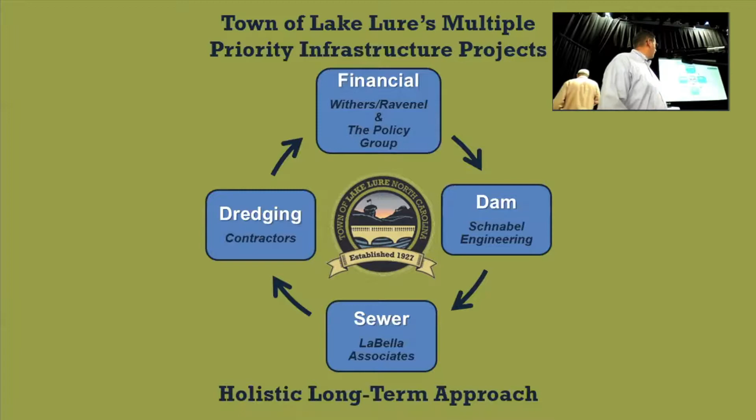So what I'd like to do is start with a little bit of history so you understand what your system is, where it is, some of the issues with the system, what our goals are, and then go through some of the proposed solutions and some of the community involvement that is required.

So to start off with, you can see the green arrow, that's actually the sewer system. This photo was taken sometime around 1927. The sewer line was installed on the north bank of the Broad River. The dam was built on top of it, the lake was filled up, and thus you have a subaqueous sewer system, or a submerged gravity sewer system. It ranges in depth between 4 feet and 105 feet. There's approximately 14 miles, or 74,000 linear feet, of cast iron pipe.

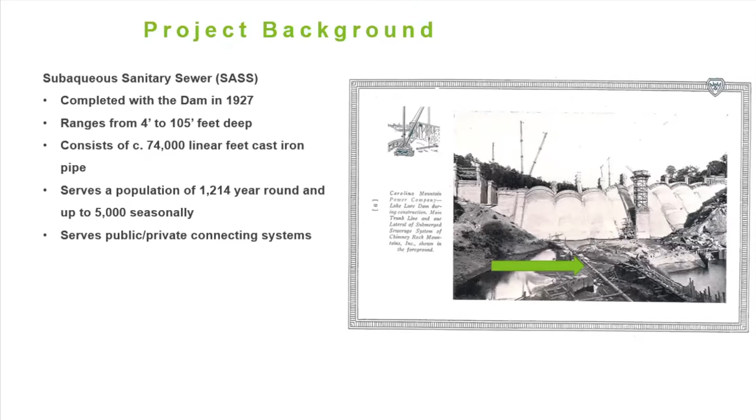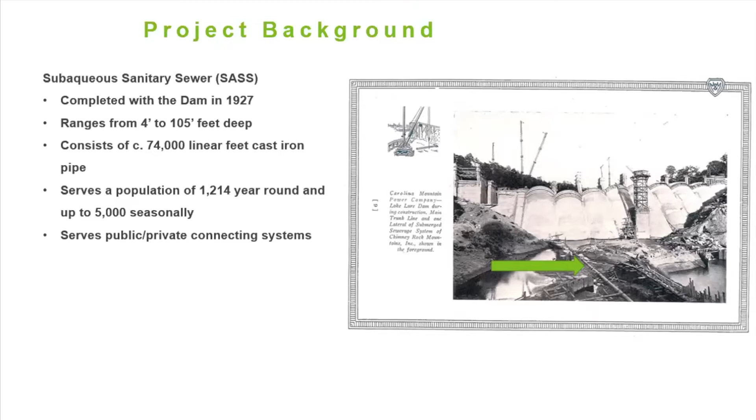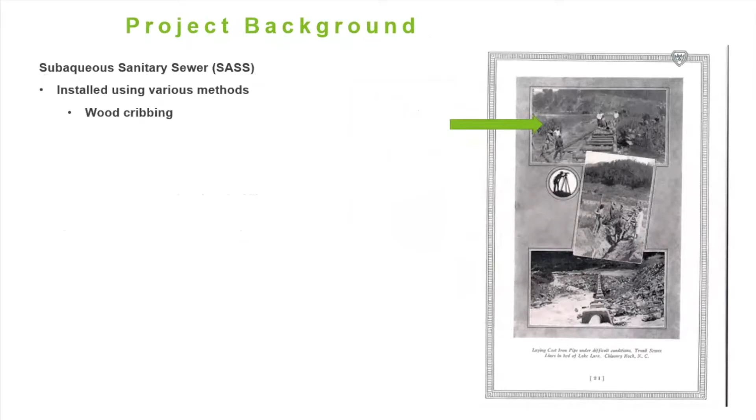You do have a seasonal population, so your full-time population is around 1,200, and it serves both public and private customers. So you have Rumbling Bald and the Rutherford County line that serves Chimney Rock Village. It was installed in a number of different ways. One of the ways was on wood cribbing. It was also installed buried under what would become the lake bed.

We believe most of the installation was like the third photo here, which is basically laid on top of the ground with concrete collars over each joint. So what we have installed along the existing grade ranges in size between 8 inches and 18 inches, and contains various bends and submerged junction boxes.

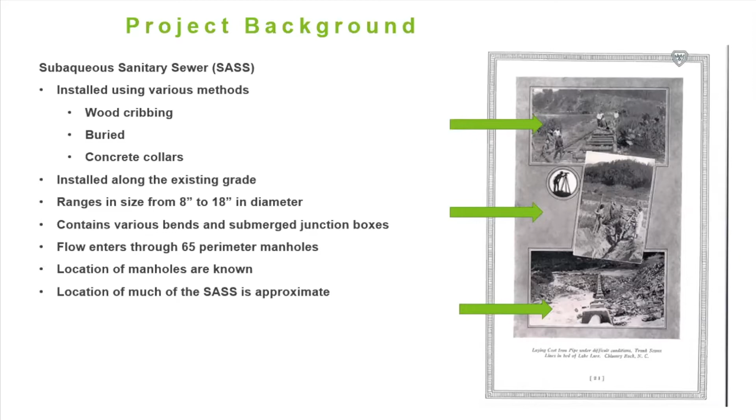The perimeter manholes that you see around the edge of the lake feed into this system that's under the lake. We know where the manholes are around the lake, obviously, but we have to make guesses about where the system is under the lake. So we don't know exactly where that system is.

Your treatment plant, prior to 1969, simply discharged into the Broad River. After the Clean Water Act, a biological plant was built, and almost immediately began suffering problems from the lake infiltration, or the lake water that's getting in the sewer and diluting it to the point that it's very difficult to treat.

In '91, that came to a head and the plant was converted to a different process, a physical chemical process, so your plant behaves more like the front end of a water treatment plant than it does a biological wastewater treatment plant. The plant has suffered from numerous notices of violation that deal with the flow rate, ammonia discharge, and total suspended solids.

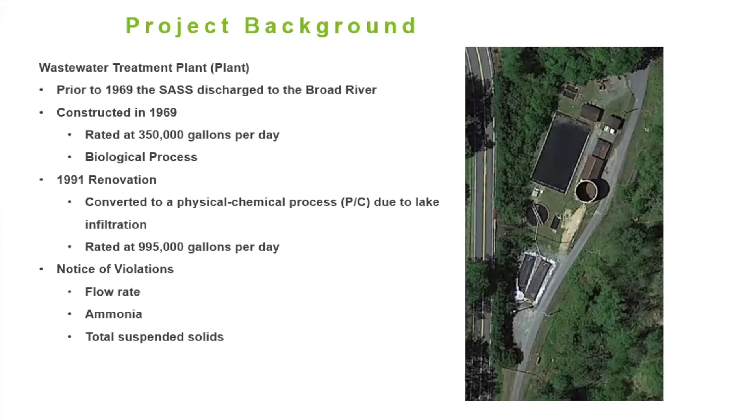The thing to realize about your current treatment process, the process put in place in '91, is that it cannot meet its current limits. So it's not a matter of running the plant differently or running it better. It physically cannot remove ammonia, so it cannot meet its NPDES limits.

Some recent projects that the town has undertaken to stem the tide: the first, in 2007, was an inspection and smoke testing, where they inspected manholes and closed circuit televisioned as much of the sewer line as they could. They were limited to about 14%, and a lot of that is because of those bends and junction boxes I mentioned, and the fact that the system is almost exclusively inaccessible.

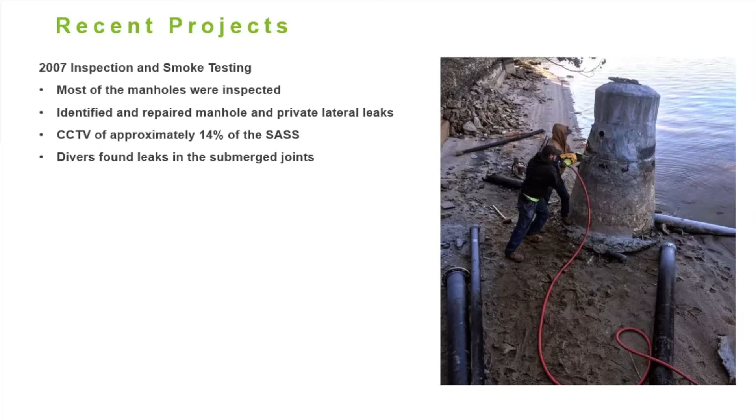Divers did find leaks in the submerged joints, which led to the 2009 pipe wrap project. Both of these previous projects were very successful, and they reduced the amount of infiltration in the lake. The pipe wrap project has a 15-year service life. It was done in 2009, so 2024 is the end of its expected service life.

Very recently, an emergency shutoff valve was installed behind the dam. What this would do is actually cut off the sewer flow going to the treatment plant, and this would be used in the event of a failure of the line underneath the lake.

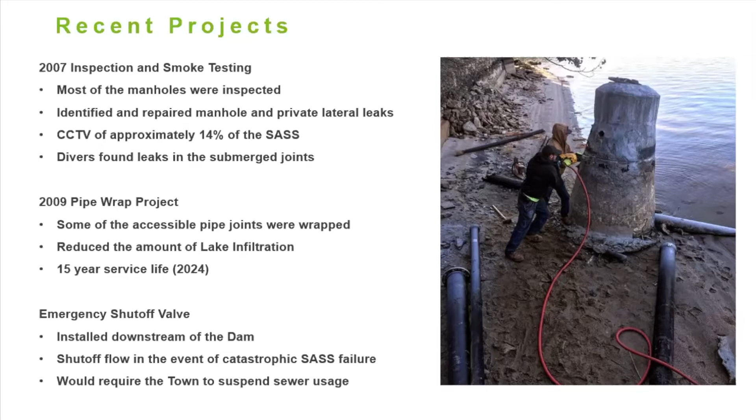The imagery, if you would imagine a bathtub that's 90 feet deep and you pull the plug, that's what would happen. If this happened, there would be a no flush order, meaning you could not introduce new sewage to the system, shutting down your kitchens and bathrooms, etc. The problem being that right now the lake water is getting into the sewer. If the line broke and we closed this valve, the sewer could get into the lake water.

Here's a picture. This is about 300 feet upstream of the dam. You can see the deterioration and the corrosion. Your subaqueous sewer system is non-compliant.

You have a long history of violations. It's been identified by the EPA as problematic. It's at risk of a complete failure. The pipes are deteriorating, nearly 100 years old. And again, a failure would result in a no flush order.

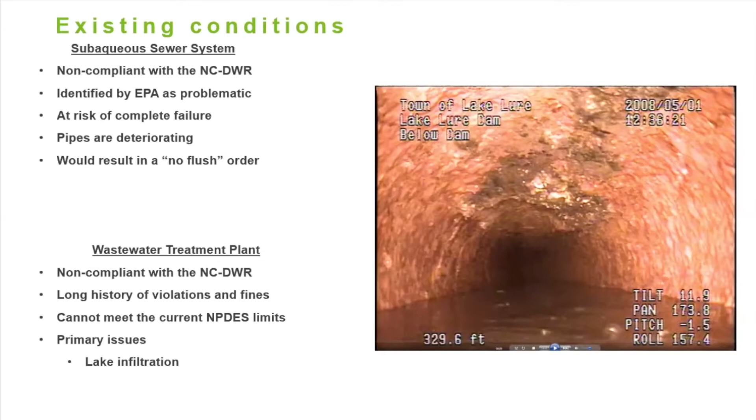Your wastewater treatment plant is also non-compliant for the reasons I've mentioned, with a long history of violations and fines. It simply cannot meet the current limits, and the primary reason, again, is lake infiltration.

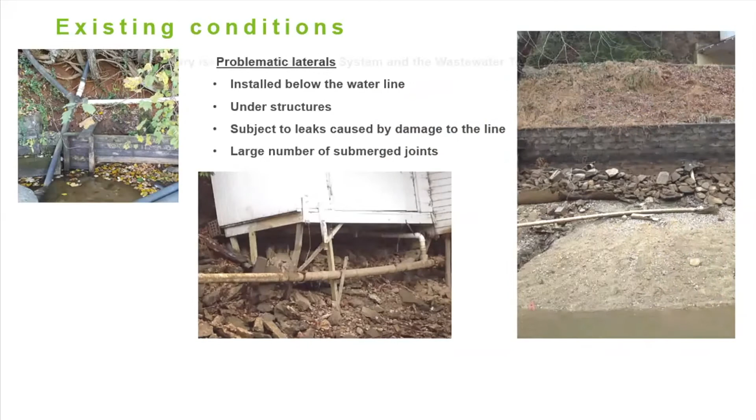Some other conditions are the laterals that you see around the lake, especially when the lake is pulled down. They're installed below the water line, under structures, and are subject to leaks caused by damage to the lines. You also have a large number of submerged joints, and any of these joints can be sources of lake water getting into the sewer system. So again, the primary issue facing the sewer system and the wastewater plant is lake infiltration.

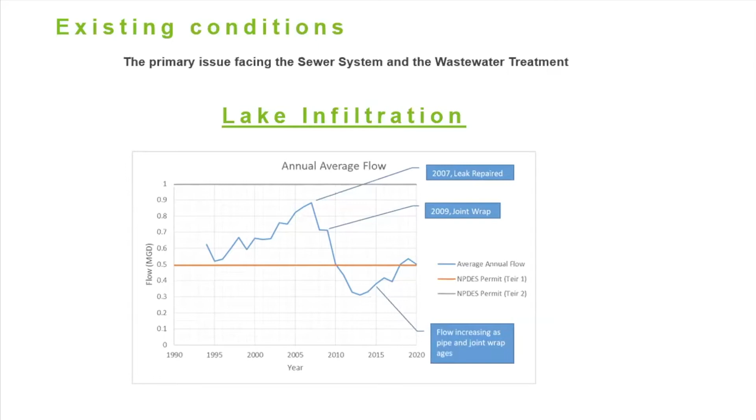But what you see as the pipes continue to age and the joint wrap continues to age is the flow is starting to creep back up, and it will continue to do so.

So what are our objectives? Primarily, it's regulatory compliance, protection against catastrophic failure, providing a sustainable and enduring collection and treatment system, a solution that's financially viable for the town, that gives access for operations and maintenance.

One of the key issues with your existing system is not necessarily that it's underwater. It's that you can't access it. We can't put a camera in it. We can't look in it. We don't really even know where it is.

We want to incorporate future growth, reduce inflow and infiltration, and provide a long service life. So we're looking at a 100-year solution.

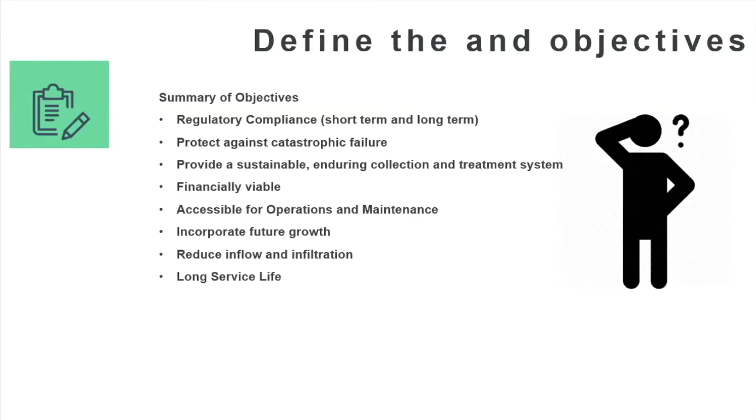So the proposed solution would be a perimeter system, installed around the perimeter of the lake, the north and south shore. It would consist of HDPE or high density polyethylene pipe and HDPE manholes with pump stations with laterals.

This system, instead of having a typical mechanical joint, would be a fused joint, which would eliminate a lot of the potential for leaks. We would, as part of the first phase, rehab some of the existing manholes.

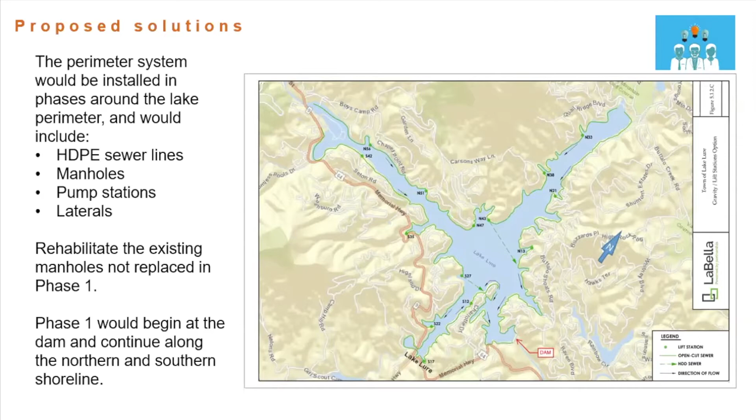This would help alleviate some of the flow problems at the plant and assist in treatment. Phase one would begin at the dam, and we'd work our way around the north and south shore.

Because of funding issues, we can't do the entire project in the first phase, but we have a strategic reason for this. As we start at the dam and work our way around, as we come past properties and those properties tie into the new system, they would be pulled off the old system and thus wouldn't have the risks associated with being on the existing system.

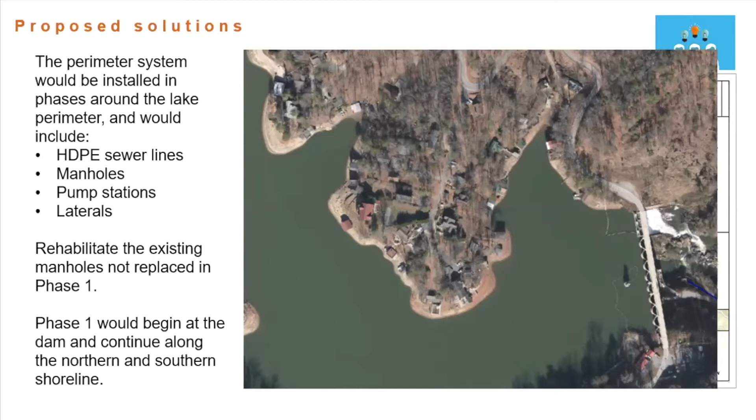So that if in the future you're tied into the new system and there is a failure, there is a no flush order, you would not be subjected to it because you're on the new system.

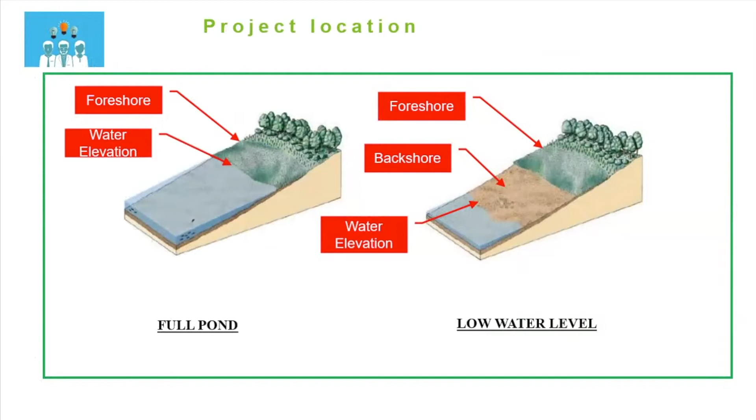So where would it go? This is what we're calling the backshore area. So you've all seen the lake when they draw the lake down and it exposes a shoreline. That is a prime place for installing the new infrastructure.

And this is what it would look like. So you would have an HDPE line that runs through the backshore area. And then you have a stub out for a lateral that would go up above the lake.

The yellow that you see is a permanent easement that would be acquired, and that would be a tie-in point for a property owner. So they would tie in out of the lake above the water line.

The benefit here would be that we would have manholes. So the line would be accessible to the public works staff. You could also lower the lake and access the entire sewer line itself, and you would no longer have those existing manholes around the perimeter or those private laterals that run below the lake level.

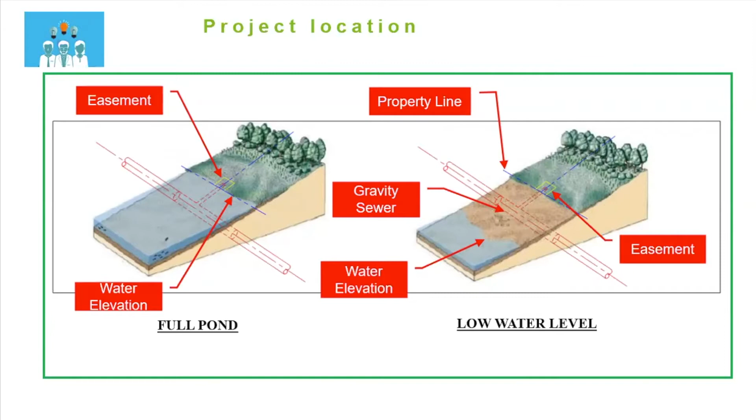We looked at a number of different systems. We've narrowed it down to three primary systems and one rehab. So the manhole rehabilitation would be a part of each individual system.

The first is a backshore low pressure system. So again, that's a low pressure system that's installed in the backshore. The second would be a backshore series pump station, and the third would be a backshore HDPE gravity lift system.

It's important to note each of these alternatives are taking place in the backshore. That is truly the best place to put the replacement system.

This is what they would look like. So this is an HDPE manhole, and it has a concrete collar, and the collar serves two purposes. The first is ballast to prevent the manhole from floating because it will be watertight. The second is it offers a amount of protection for the manhole itself.

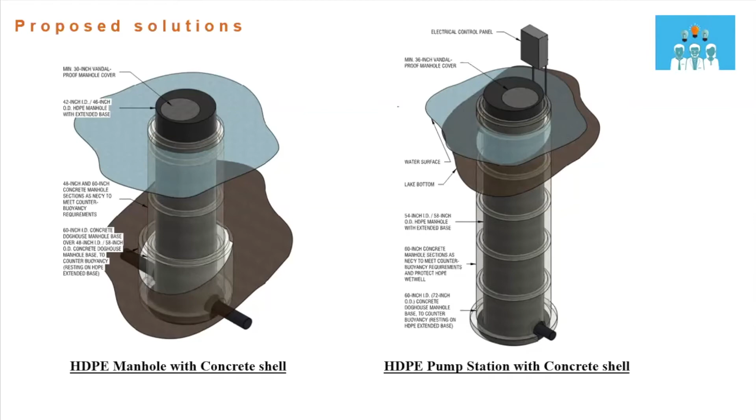The pump station would be exactly the same way. It would be an HDPE pump station with concrete collars that would provide ballast and protection.

The project, we're looking at three different phases. We're looking at three different steps. We're looking at a short-term, mid-term, and long-term.

So short-term is what's called a special order by consent. It's a legal agreement between Lake Lure and the NCDEQ, and it would protect against additional fines and penalties, protect it from further regulatory involvement against third-party litigation. It's important to note this is short-term, and it would not reduce the risk of a SASS failure.

The midterm solution is the manhole rehabilitation. And what this would do is extend the service life of the existing system. It would remove potentially hundreds of thousands of gallons of lake water that enters the system every day.

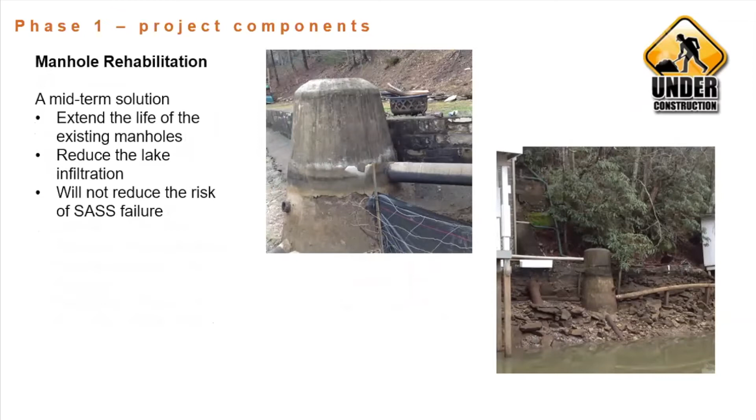But to note, it would not reduce the risk of a failure of the submerged pipes. An important component of this system is what we're calling a sewer access valve or a reservoir drain. It does double duty: from the sewer system, this would allow us to lower the lake below the current maximum or minimum water level.

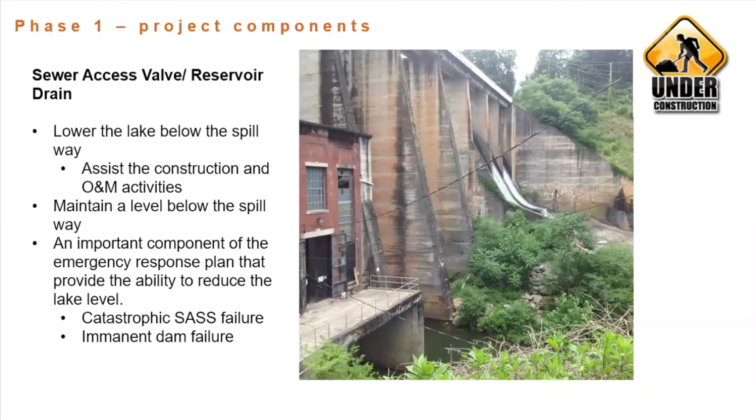So below the spillway, we're down to approximately 20 feet. This would give us an extra construction area for the system, and it would also help dewater the area. In terms of emergency response, it would give us an insurance policy to help with a catastrophic SASS failure, and it could also be used if you had some sort of damage or an imminent dam failure.

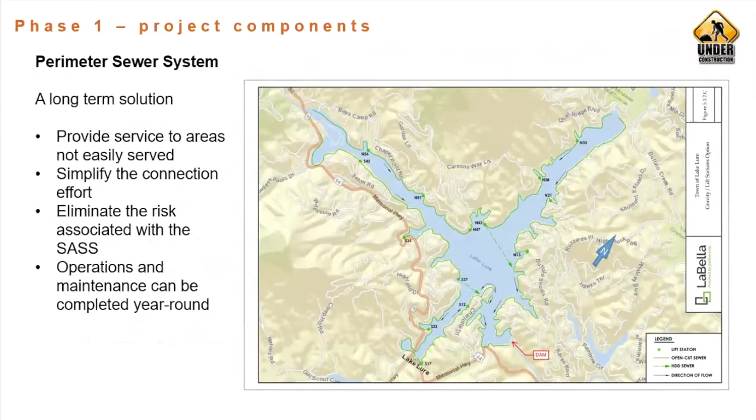The long-term solution is to replace the existing system. This would provide areas that are not currently accessed or are difficult to access. It would simplify the connection effort because you would be making your tie-ins at your property line in front of the homes. It would eliminate the risk associated with submerged piping, and it would assist public works with operations and maintenance, making it accessible and able to be completed year round.

With the schedule, what we're looking at this winter in January is bringing the lake down, and that would enable us to do a number of things.

We're looking at doing an RFEOI, which is where we bring contractors out who would be interested in bidding the project so they can see the project location and see what we're trying to build. Obviously, right now, the project area is underwater, and you can imagine a contractor would have some difficulty bidding a project that he can't look at.

We are also going to do some additional geotechnical work and surveying, with a plan toward beginning construction or phase one in 2021, 2022, or winter of those years.

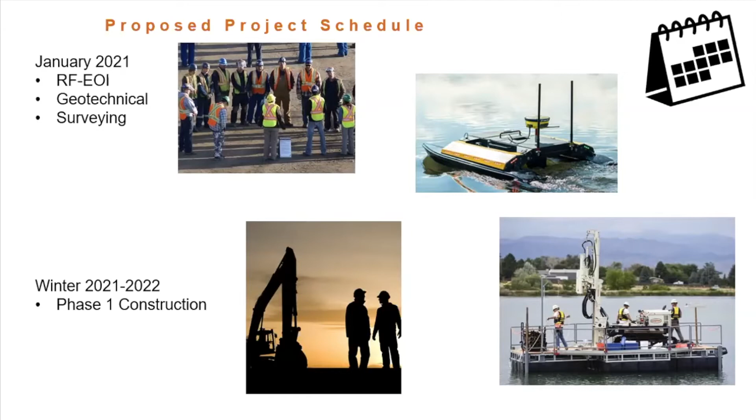This project will require community involvement. One of the big things is lake use. With the lake down 20 feet, the lake would be restricted during the construction period. There will be equipment on barges that will be on the lake, and pipe that's floated out in the lake as part of the construction process.

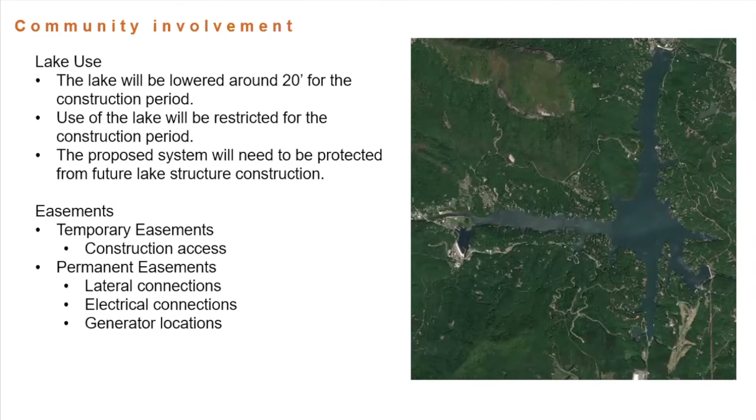In addition, once the new system is in, it's going to be running through the backshore, so with the new lake construction, we'd have to take steps to ensure that the new pipe is protected. There will be easements required - temporary easements for personnel, machinery, and materials during construction, and then permanent easements for the laterals I showed you earlier, for electrical connections and for generator locations.

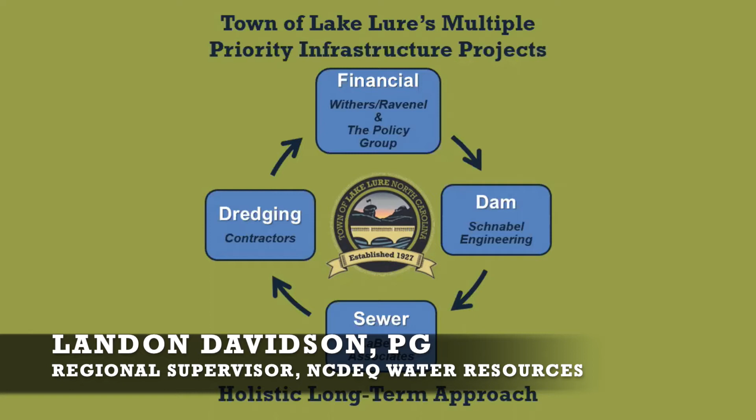Yes, thank you. So thank you for coming out tonight. This is a very big project, as you'll soon see. If you live here, which you probably do because of your interest, you know that it's a unique destination. I'm very proud of that. You should be - I live in Black Mountain, we come over here.

My agency is a regulatory agency that oversees protection of groundwater and water resources. So we oversee discharge of wastewater treatment plants, coal ash, animals for the 19 western counties. I am that person that signs and assesses the fines that they have referenced and the violations. Also the person that speaks with EPA.

The EPA is always interested in Lake Lure. We meet annually - they look at some of our more non-compliant sites, and obviously this is one of them, chronically non-compliant for the reasons that have been pointed out. I have been familiar with Lake Lure, at least in the NPDES - that's the discharge part of it - and the collection system since about 2013.

So I present myself today to tell you that I'm the person responsible for the compliance aspect and motivating that and moving it along. I'm also, on the other hand, a person that is completely trying to be engaged in this process and collaborating.

You should be very proud of where you are and where the town is right now. These types of public meetings with this level of engagement and networking is a rare thing.

Infrastructure degradation across the country is happening. It's happening in North Carolina at many locations and wastewater plants. The problem here is you can't just drive out to the pipe that's falling apart and replace it piece by piece like some municipalities are. You've got a much more complex and unique system. And when you have complex and unique, that often translates to a higher cost. It's a legacy problem.

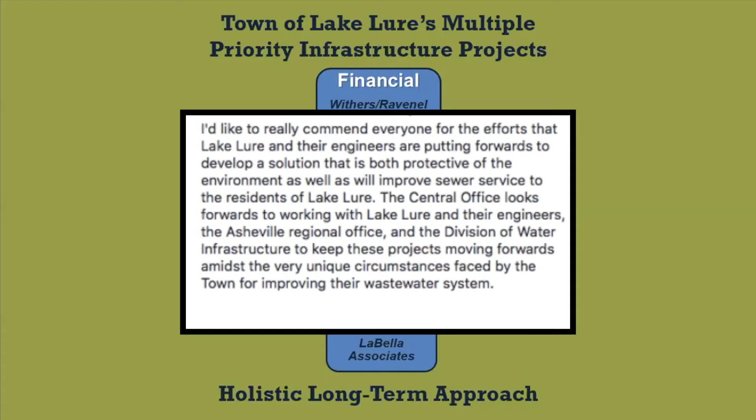We did have one further comment out of the main permitting office in Raleigh that echoes what you had to say. In essence, the central office looks forward to working with Lake Lure and their engineers, the Asheville Regional Office, and the Division of Water Infrastructure to keep these projects moving forward amidst a very unique set of circumstances faced by the town. I think that's a good positive outlook from the division, and they also commend everyone for the efforts they've put forward so far. Thank you very much, we appreciate your comments, Mr. Davidson. Now we'd like to turn to Jonathan Pittman with Schnabel Engineering for his presentation regarding the options on the dam.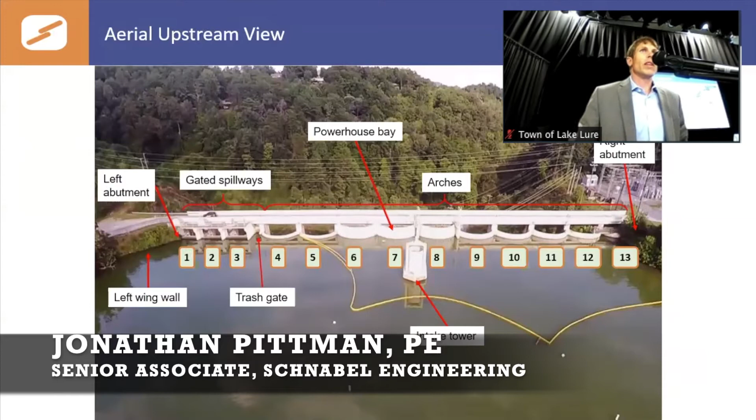All right, good evening everyone. I just want to share a little bit about the work we've done over the last couple of years to look at options to make some repairs to the dam, to address some state dam safety requirements, among other things.

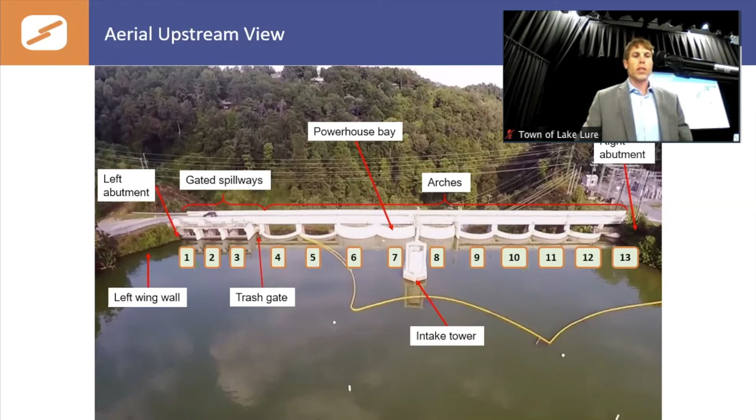Just first, briefly, this is to give you a little background. This is an aerial of the dam, looking from the lake downstream. This dam, like the sewer system, is nearly 100 years old, so it's infrastructure that's been in place for quite some time, and certainly can't expect to have a much longer service life without major upgrades or repairs. So this layout here, I'll reference a little bit - you see on the slide those bays are numbered 1 through 13, looking left to right there.

This is a very unique dam, a complex structure. Those bays 4 through 13 are what's called an arch buttress dam. I don't have time tonight to go into the details, but it was a really neat technology, really an engineering marvel in its time, developed primarily because when this dam was constructed, labor was very cheap and materials were quite expensive. So it's not a whole lot of concrete in that mass - it's a relatively thin structure that uses the weight of water to stay in place, essentially. So that's bays 4 through 13, which make up the majority of the dam.

Then to the left of that, you see bays 1 through 3, and that's the gated spillway section, or what I'll also refer to as the concrete gravity section of the dam. That's where you pass normal flood flows - when you get a rainstorm, you pass them through those gates.

This dam is regulated by the state of North Carolina, and there's different classifications for dams in the state, but this dam is considered a very large high hazard dam. The very large refers to the size of the structure - it's over 100 feet tall, about 125 feet at its maximum point, and it obviously impounds a large volume of water.

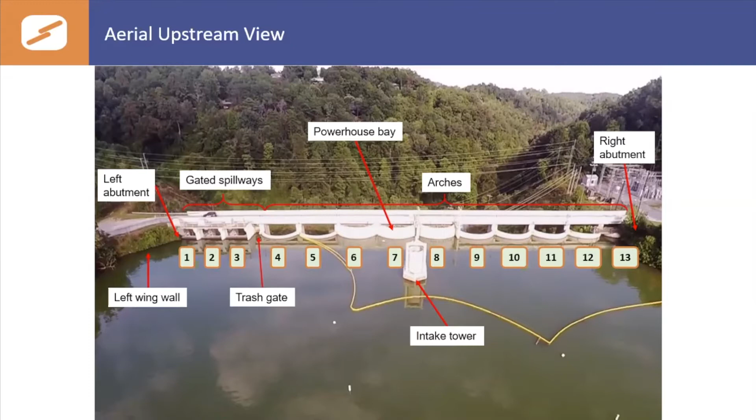In 2018, the state requested some additional information from the town, and the town brought Schnabel in to assist with that and to further evaluate the existing condition of the dam. Certainly the dam, like I said, nearly 100 years old - overall it's in fair condition considering its age. It's performed remarkably well over its service life, done what it was intended to do, what it was designed to do, and done it fairly effectively. But as I mentioned, it's nearly 100-year-old infrastructure, and it can't be expected to continue to perform well without significant repairs or other things. We identified several items that need repairs, ongoing maintenance, and that sort of thing.

On top of that, the dam has to meet certain criteria based on size and hazard classification. North Carolina dam safety laws really didn't come into effect nationally until the late 1960s, so this dam was built well before those standards. Those standards have been updated since based on things we've learned, better guidance, better science, and they continue to evolve with time. Because of that, this dam, like many others built at its time, doesn't meet current criteria across the board. Specifically for Lake Lure Dam, I've listed here the main components where it does not meet current dam safety criteria.

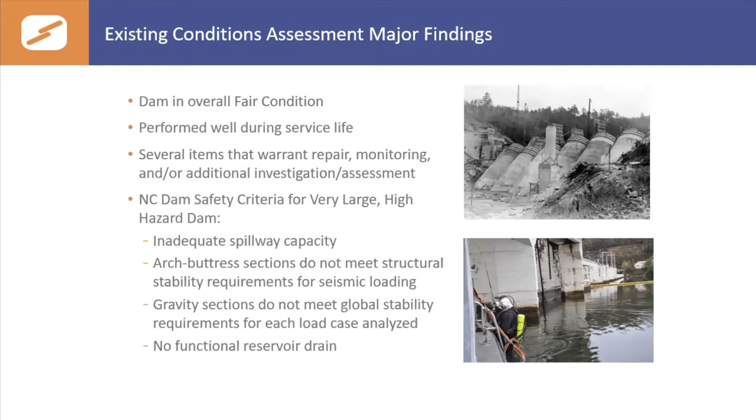Reese talked to you a bit about the sewer access valve, also referred to as the reservoir drain. In the dam safety world, I'm going to refer to it as the reservoir drain, but they're the same thing for this discussion. Dam safety requires that the town have the ability - all high hazard dams have the ability - to completely drain the reservoir in the event of an emergency, or nearly drain it. Right now the town only has the ability to drain the lake about 12 feet using the spillway gates, so there's a need to drain the lake to a much lower depth in an emergency. I'll talk more about the reservoir drain in a few minutes.

So to look at those, we have those criteria, which I'm going to refer to as deficiencies for this conversation. We need to address those deficiencies and dam safety requirements, so we looked at alternatives to do that. As part of that, we also had several other objectives to look at options to address those items. One of those is extending the service life of the dam significantly - you don't want to invest a lot of money in the structure if you're not going to get a much longer life out of it.

Also, not modifying lake levels for permanent purposes - you want to keep the permanent normal pool of the lake where it is. You also don't want to increase the potential for upstream or downstream flooding significantly. I've listed everything here and you have these notes. There are several other things we did consider when evaluating options, and one of them was minimizing impacts to the community to the extent possible during construction of any rehabilitation project and following construction.

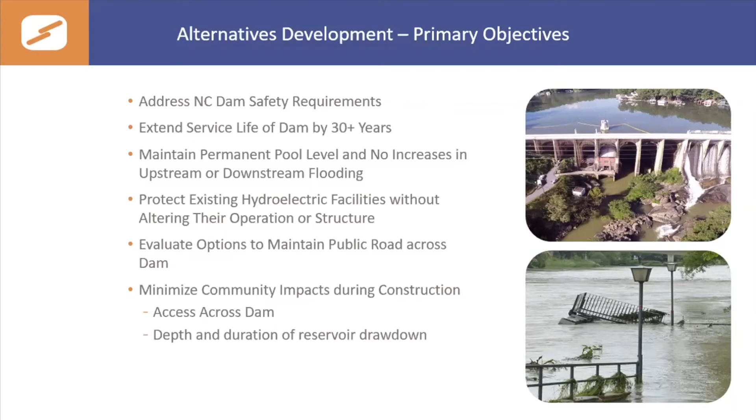From a dam rehabilitation standpoint, we looked at multiple options to address those items. I'm only presenting the one here that we feel is the recommended rehabilitation alternative, and these items address the main body of the dam and meet those dam safety requirements I already mentioned. So to meet hydraulic capacity, we need to pass more water through that dam. How do you do that? Well, one, we would improve the efficiency of the crest where the water flows over the top of that arch or weir, by changing the shape of that.

We would also lower those arch elevations, taking them closer to the normal pool elevation of the lake, so we can pass more water over them before it goes over the sides of the dam.

From a seismic stability standpoint, there are really two options to address seismic stability. One is to add bracing in between those arch bays. The other is to fill those arch bays in with concrete.

What you see in the bottom right is that geometry. You infill each of those arches with mass concrete, and you essentially turn the dam into a concrete gravity dam.

Similar to what you have now at the gated spillway sections at bays 1 through 3. At those gated spillway sections, to address the stability conditions I mentioned before, you would drill anchors through the concrete, tie those anchors into rock, and essentially ratchet that concrete down into the underlying bedrock to prevent it from potentially sliding. This project would also include the reservoir drain installation, which I'll touch on in a minute.

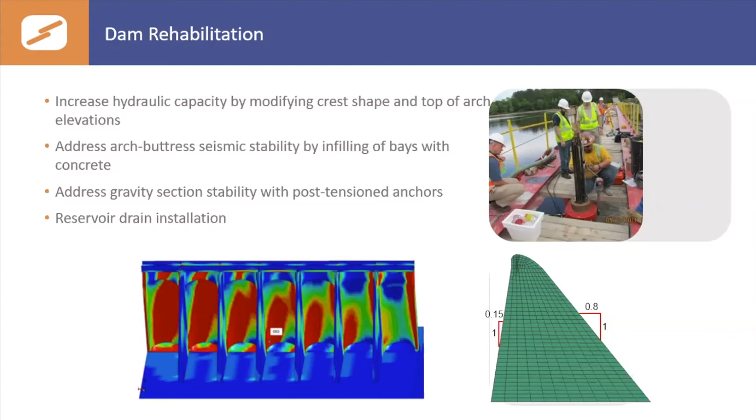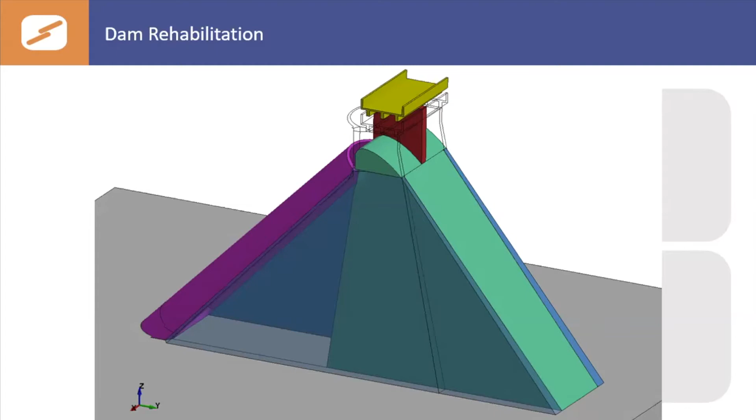So here's a graphic, which you can probably see better in your handout. The green you see there is essentially the infilling of those arch bays with concrete. You infill those with concrete, then you have that curved shape at the top. That's called an ogee weir, and that improves the hydraulics and allows you to pass more flow over the dam safely.

The main focus of our study was on rehabilitation options for the dam, but we also considered full replacement. What does that look like? It would include building a new concrete structure immediately downstream of the existing dam and essentially demolishing the existing dam, or the majority of it. Anything left would be well underwater at the lake.

There are some advantages to this option, and some disadvantages as well, which I'll touch on. One thing to address here is this would require new construction for hydroelectric facilities as well.

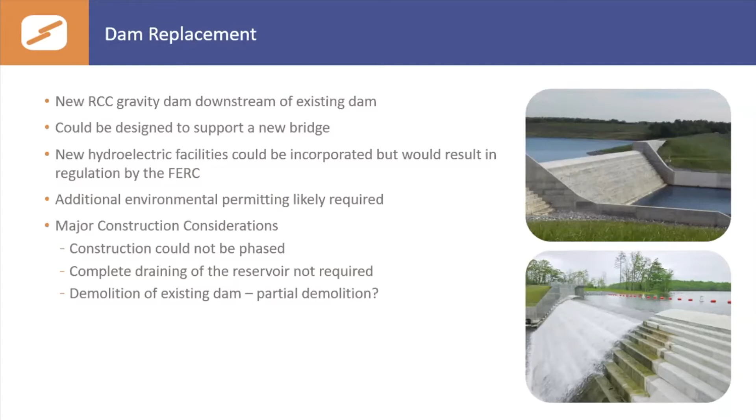So there are several other advantages and disadvantages here, but I'll go over those on the next slide. Here's an overall comparison of rehabilitation versus replacement.

We looked at options that both have extended service life. The rehabilitation is a major project. This is a very challenging dam to address those dam safety requirements, and there's no simple quick fix to do that. It involves a major rehabilitation and major modifications to the structure.

So what you get when you make those major modifications is a pretty healthy extended service life for that existing dam. For a replacement dam, you get an even longer service life. I put 100 plus years on here. It could last 150 more if it's maintained well, among other things.

Certainly, as part of this, there are multiple factors to consider in deciding whether it's rehabilitation or replacement. Again, with the existing infrastructure, you can't just look at the dam in one box and make a decision there. There's a lot of other related components, the bridge, the sewer, the lake itself and what goes on there.

So all those things need to be considered in selecting the best alternative for the dam. Certainly lake levels is one thing for a rehabilitation project. You would likely have to draw the lake down significantly for a period of time to do work on the intake tower and maybe the dam itself, whereas a replacement would not require a significant drawdown of the lake to construct. So you can phase a rehabilitation project more, potentially in a few different phases. That may increase cost, but there's a little more flexibility in terms of schedule.

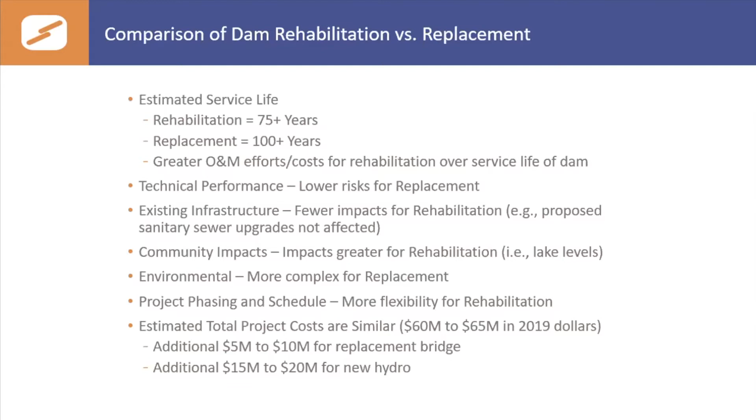You can see the costs down at the bottom are fairly similar overall in terms of estimated total project cost. You're looking at $60 to $65 million to rehabilitate or to do a major replacement of that dam. So a significant cost there. And I've listed a couple other costs that apply, for a bridge to go back, and then to add new hydro back to a dam replacement, that would be on top of that 60 to 65.

So the reservoir drain, I've talked a little bit about that. The town is moving forward with that project. It addresses multiple requirements. As Reese mentioned, it allows the sewer work and critical sewer repairs to proceed. It benefits lake dredging, allows that to be more efficient and potentially reduce costs. And it also meets the dam safety requirements.

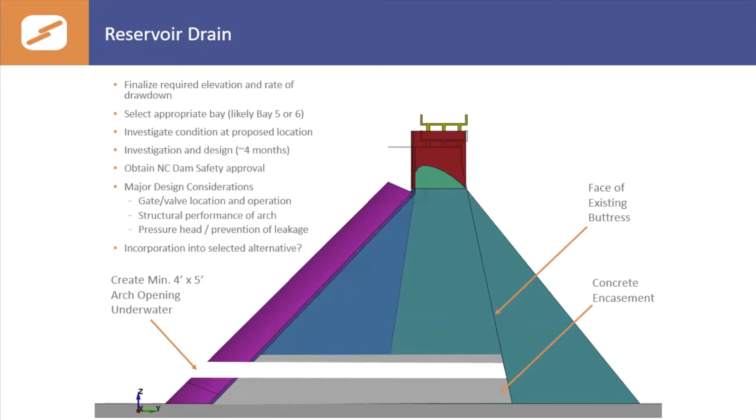So that work would be done as a separate phase and installed at the base of one of the arches in bays 5 or 6. And the town is taking steps to obtain funding through a grant from FEMA and others to move forward with that work to address the dam safety requirement and benefit several other infrastructure components.

So I've mentioned that the town is moving forward with the reservoir drain as the initial phase. The next steps for the dam ultimately are to decide which direction to go, rehabilitation or replacement. And there's a tremendous amount of stakeholders involved in this project. A lot of coordination with those stakeholders is required moving forward in determining the most appropriate path forward for the dam.

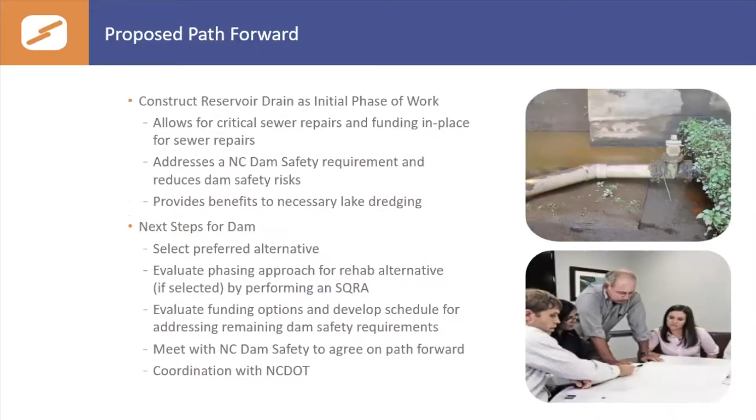I believe that's it. Thank you, Jonathan. Appreciate your presentation. And now we'd like to call on Mr. George Eller. He is the state dam safety engineer. He would be responsible for permitting and overview of the alternatives that you have seen. And now, Mr. Eller, if you would offer your comments, please.

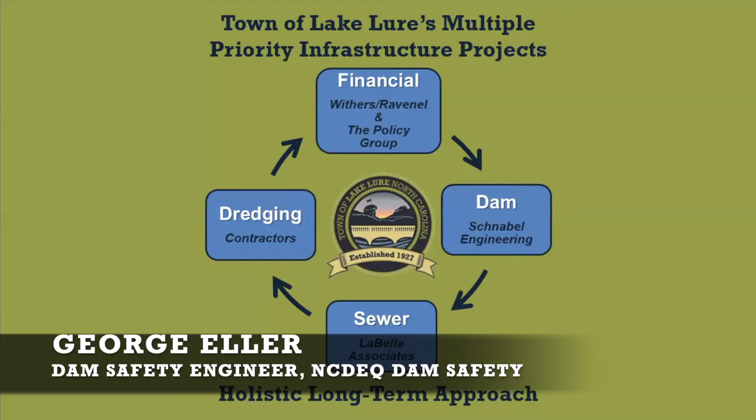Hi, I'm George Eller. I'm your state dam safety engineer for North Carolina. State dam safety, even though we're part of DEQ, much of our work is in public safety. We do work a lot with environmental emergency management out of the Department of Public Safety. And our main objective is the health and safety of the public.

Keeping people safe from dams and making sure that the dams are safe. This dam is a fairly large dam, as Jonathan said, 125 feet tall. It impounds 45,000 acre feet of water. That's a lot of water. It is a high hazard dam. High hazard meaning that if the dam should fail for whatever reason, people are likely to die.

There's quite a few people in the valley below the dam. There are houses, roads, other infrastructure, utilities, things that would flood in the event that the dam failed. The population at risk is estimated to be in the hundreds of people that would be likely to perish if the dam failed.

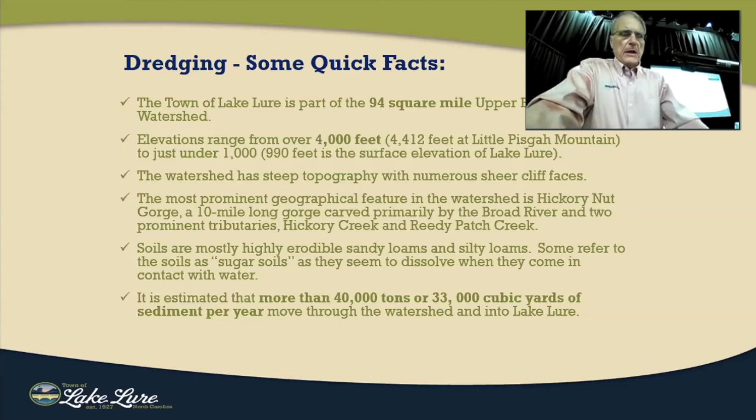So the town has to do something about that to keep the lake usable. To give you an idea of the size of that: there's 40,000 tons per year—this is per year, 40,000 tons. To give you a feel for 40,000 tons, some of you may have visited the USS North Carolina in Wilmington, the World War II battleship.

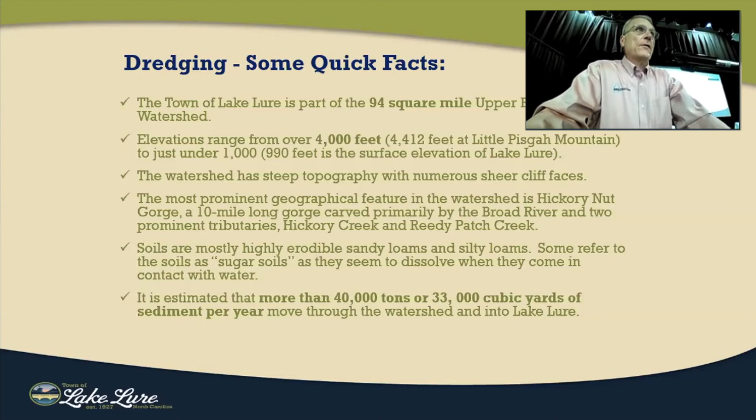That weighs 35,000 tons. Another idea: the 33,000 cubic yards that represents is enough silt to fill this entire gymnasium you're sitting in 3 times. That's per year, so that's quite a challenge for the town to get that silt out.

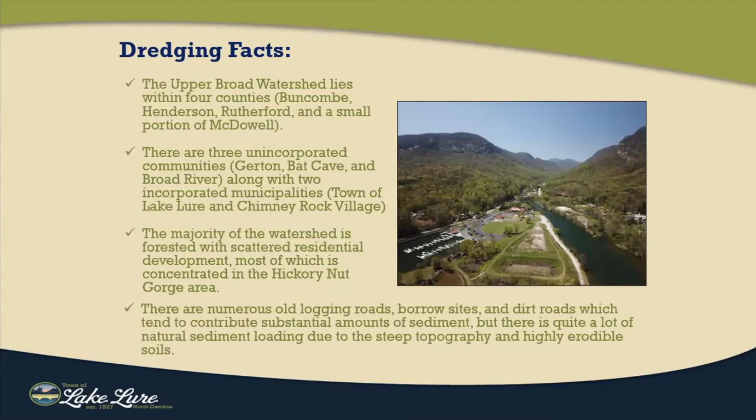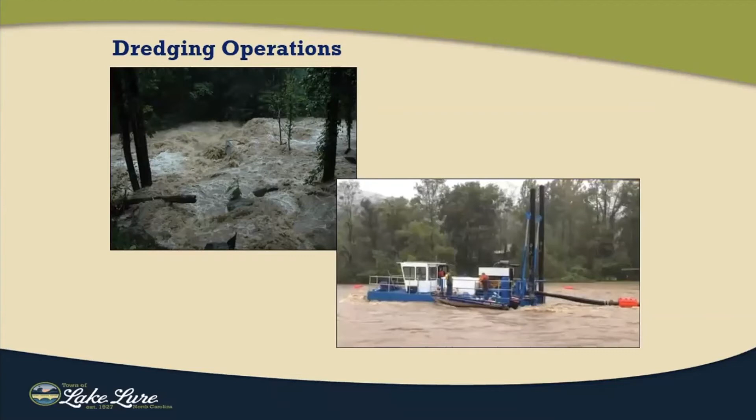Here's a picture of runoff during a very heavy, significant rain event. That's Broad River rushing into Lake Lure. Also, you see there a method of dredging, a floated barge with a dredger on it. That really doesn't remove a lot of silt, but you still have to do it.

Here's some of the money the town has spent over the last 10 years. They spent about $2 million, averaging about $185,000 per year, and they're not able to get ahead of the curve. It's catching up to them, or exceeding them. They have to catch up and get this silt out.

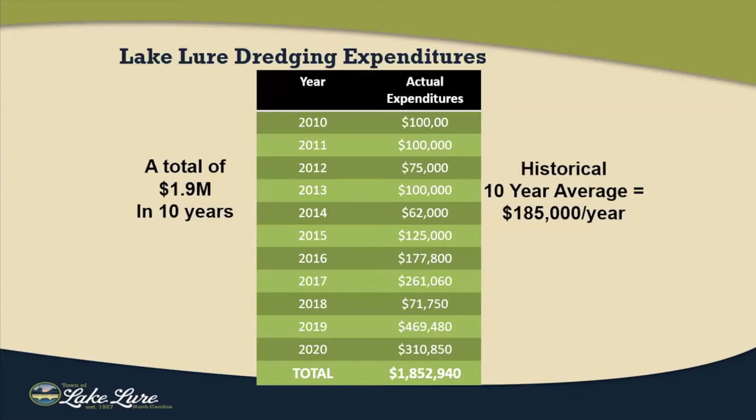So the town is planning on spending in the future about $425,000 per year to get that 40,000 tons out, not just to remove it but to get ahead of the curve because it's still catching up. This is a big challenge for Mr. Dean Givens and the town staff to address, and this is what your town is currently doing.

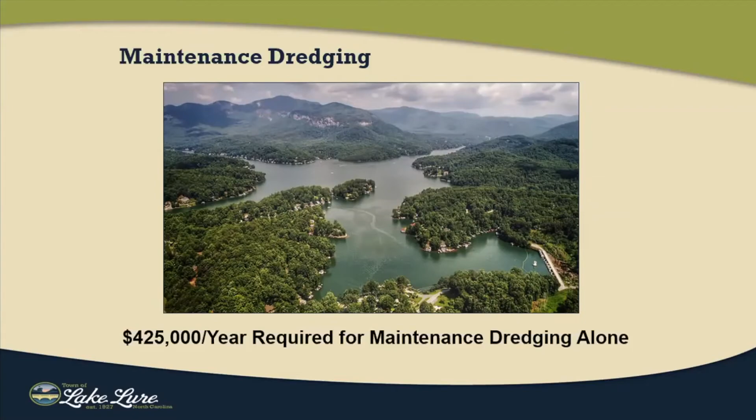And that's just part of this whole cycle: the dam rehab, the hydroelectric facility, maintaining that so it can continue to provide revenue through the sale of electricity to Duke Energy, your subaqueous sewer system, and dredging. So the town did retain a consultant to look at all the financial aspects of this and give recommendations on revenue streams.

That was Withers Ravenel, and Mr. Seth Robertson is here to make his presentation on the financial aspects of all this.

Thank you, Kurt. Good evening. So we've been talking about a lot of challenges for the last hour or so now. As important as it is to make sure we get the right technical solutions for all these challenges, it's equally important that we have the right funding and finance solution as well. Doesn't matter how good the engineering is, and I think we have some good engineering going on here trying to really look at all the different options and the best way to do things, but it doesn't matter how good it is if we can't afford to pay for it.

Much like Landon talked about, I have a professional and a personal interest at this point in my life in this project. Before I joined Withers Ravenel as Director of Funding and Asset Management, I worked a little over 13 years for DEQ, Division of Water Infrastructure, managing the State Revolving Fund Program, which is where the funding has historically come to pay for this type of work for wastewater infrastructure and for Lake Lure.

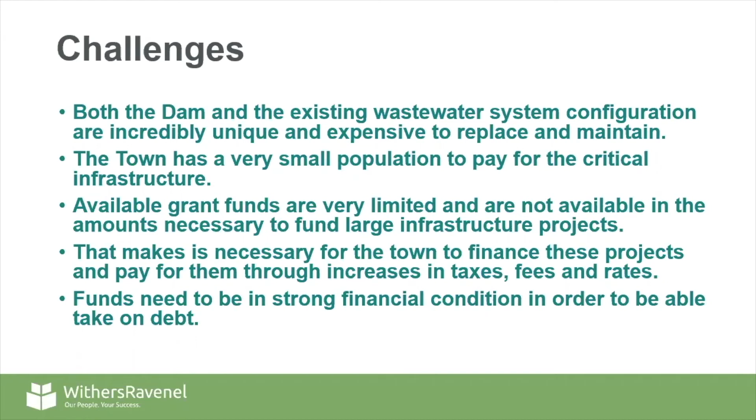So the first steps—this is where we're at today. The town currently has $12.5 million of 0% interest loan money to complete phase 1 of the wastewater improvements, with the goal being to get as much bang for the buck as possible out of phase 1, do as much as we can, and get the town as in compliance as possible with phase 1. Then work on a long-term plan for future phases to accomplish the big picture, to get where you eventually want to be, but with the understanding that let's do what we can now and come up with a long-term strategy to get where you want to go.

The town recently increased water and sewer rates by 30%, and that 30% increase is solely tied to maintaining adequate reserves and paying the debt service on the $12.5 million. So there's an annual bill that essentially goes along with that, and that's how the rates were set—to pay that bill every year when it comes due, when this work is complete, and to get everything in position to be able to do so. That equates to about $13 a month for the average water bill, about $20 a month for the average sewer bill.

And I can tell you it wasn't entered into lightly. There was a ton of discussion, a lot of planning, and an attempt to make sure that anywhere costs could be cut to try to limit the amount of increases that had to be put in place now, it was done.

In addition, the town needs to increase the tax rate by 6 cents. That will help cover some of the increased dredging costs and make sure all the funds are in place, and to start getting ready for the possibility of taking on additional debt for the dam project when that time comes—to get everything in position so it's ready to go when we get there.

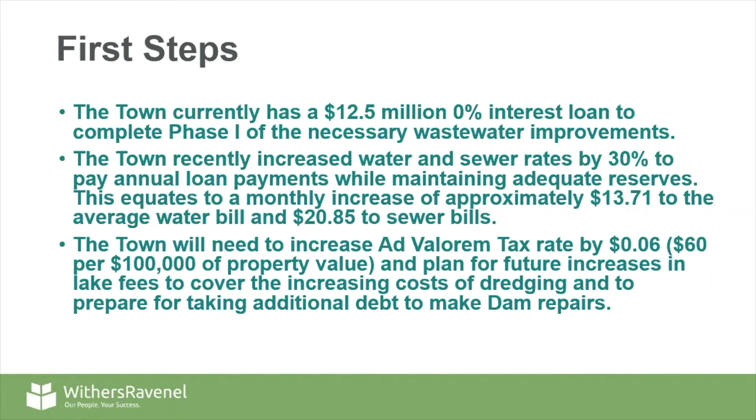To give you an example of the 6 cents increase: for a $200,000 home, your tax bill is going to go up $120 a year. For a $250,000 home, it's $150 a year.

Next steps: the town's going to continue to evaluate opportunities to reduce existing costs and to phase additional work to minimize financial impacts, with the understanding that no decision can be made about the right infrastructure project without understanding the financial impacts and how it's going to be paid for.

The town's going to continue to pursue subsidized state and federal funds to reduce the cost to citizens—any grant that's out there, the best loans that are out there, whatever the best funding is—to go out there and make sure it's the best package available to lessen the burden as much as possible.

And to pursue all other options to cover the remaining $87.5 million gap in funding. We said we have $12.5 million now; at least $87.5 million more in funding is going to need to be secured at some point to meet all the needs we've talked about here today. And to talk about some of the other options the town is looking to investigate to get additional support and assistance in obtaining that funding, I'm going to turn it over now to Steve with the policy group for him to talk about their role.

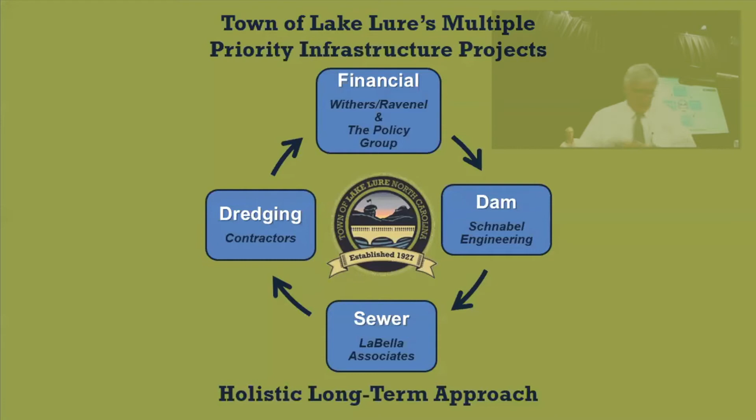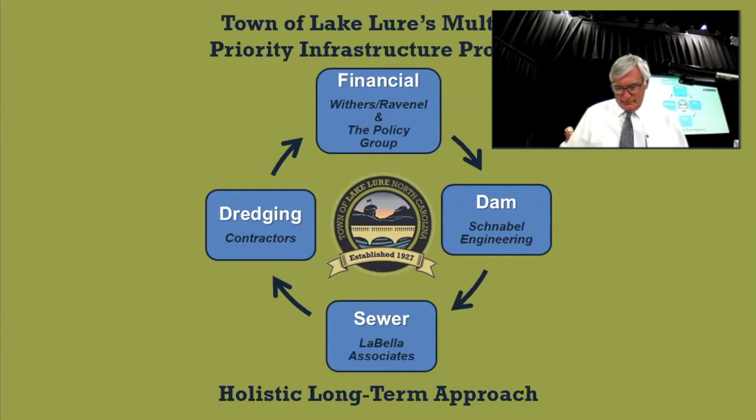There we go. Well, thank you. It's been a long day, but it's been a fruitful day, and we have learned a lot. I know I have learned a lot, and that has been my major goal today, was to educate myself as to the needs of the town and where we go from here.

I just have one slide in front of you, and I don't have a whole set of recommendations to make to you. I'm working on that, and then we will talk about how I want to approach that shortly. But first, let me just say thanks to the mayor and the commission and staff and to everyone.

And our colleagues on stage, all the folks. And it's also really good to know that we have, with this group today, the regulatory agencies and the folks who do oversight to work with everyone. And it's in a really collegiate manner, and it's really interesting to see.

I do want to come back. Senator Hise, thank you for being here. I know it's a long way to Spruce Pine, and you have a bride and twin boys up there that you need to get back to, but we really appreciate you coming here. Senator Hise has been a friend of Western North Carolina, and I really appreciate his service and his friendship.

What I'd like to do is tell you a little bit about the policy, as you see in front of you. I'll talk about the policy group, and then a little bit about how we approach this whole issue.

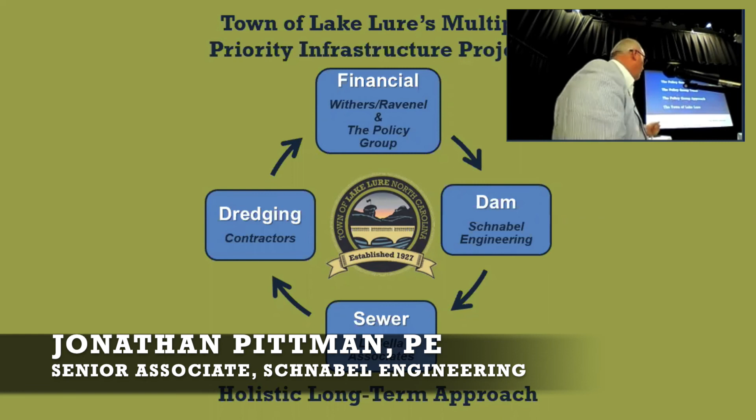Scott, if I could expand on that a little bit? Yes, sir.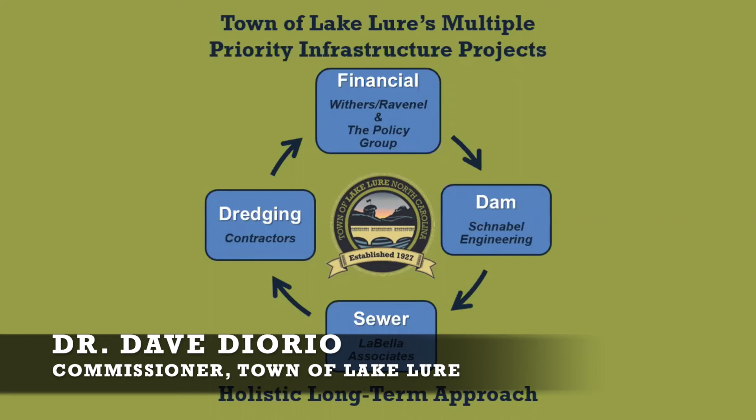This is a hugely important point because the valve has two functions, an operational function and an emergency function. On the operational side, right now we can take it down to 12. As they stated, we can take it down to 20. That extra 8 feet with that valve buys us a tremendous amount of leverage. It'll save us money because the designers of the sewer system now have more gravity on their side to make it more efficient. It'll also save wear and tear on the boathouses because the wave action down at 20 feet isn't like the wave action at 12 feet, where it hits your seawalls and docks at a lower level. So the erosion

theoretically goes down by going down that 20 feet. So that's operational. Wildlife not affected - we know what they've done at 12 feet. 20 feet is not a big deal.

Emergency use, going from 20 down to 90, we hope we never use, because that means you're going to be draining the lake. Sedimentation goes through that valve into the broad river, not good. Fish have nowhere to go, they'll get confused. Birds will no longer have the wetlands needed to migrate through the area. So that emergency use of the valve, we hope we never use. But as state dam safety will tell you, having the ability in case of emergency to have that valve could potentially save lives in the future. So two different functions, same valve, big value for us.

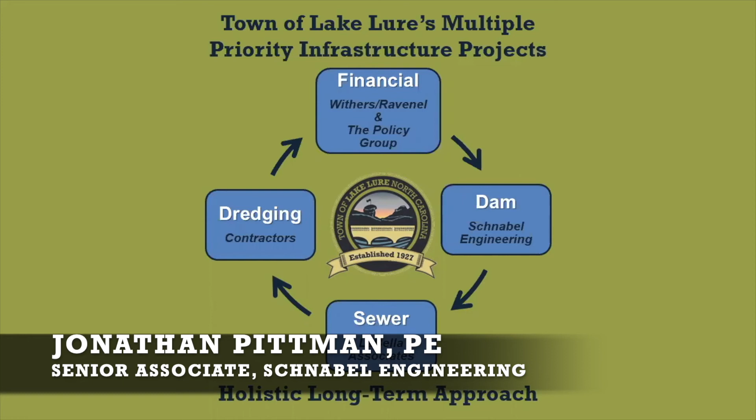Well, like any of this stuff, it can be a complex answer to that question. But for either of the options I mentioned, rehabilitation or replacement, if the funding was in place to do all of that work in one mobilization at one time, the construction of those options would probably take on the order of 30 to 36 months, 2.5 to 3 years for the rehabilitation project, and likely a little bit longer, 3 to 3.5 years for a replacement project. Now that's an estimate, and that may be on the high end of that duration for construction. Certainly there's a lot that goes into that as well beforehand.

The design process typically takes on the order of a year plus to go through everything on that end. So it depends - like I said before, there's some work that may depend on if you phase the project and how the project is phased. Hopefully that answers the question. But the short answer is, if you had everything in place and said we want a new dam or a major rehabilitation, it would probably, from this point forward, be on the order of 4 to 5 years before you had it, if you started today.

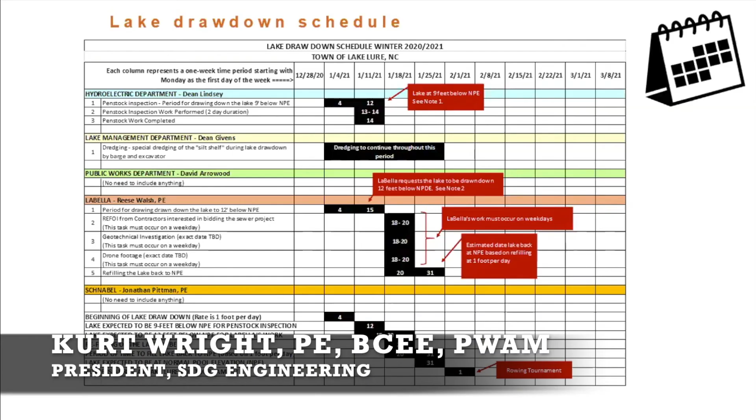In order to answer that question, turn to page 19 in your booklet. I put this schedule together, and as long as I'm the town engineer here, that's one of the tasks I have, to manage the lake drawdown whenever it's required. It was required last year, and it's required again this winter, meaning typically December and January.

So I have to work in conjunction with all your department heads, and I work also with your commissioners. To give you an idea, one of the first questions is relative to Dean Lindsey, the new director of the hydroelectric facility.

When you draw down the lake, that impacts your revenue stream from Duke Energy, so I have to coordinate that with Mr. Lindsey. We also have to coordinate timing with your consultant, LaBella Associates, regarding additional engineering data that's required.

So the short answer is, on this schedule, which the commissioners are currently considering, the drawdown will start the Monday after New Year's, which would be January 4th. You'll see that on the schedule.

So in order to read that schedule, you see a column, and at the top of the column is a date. That date is the Monday of that week. So each column represents a week, identified by the date that falls on that Monday. So you see that Monday, January 4th, the drawdown starts.

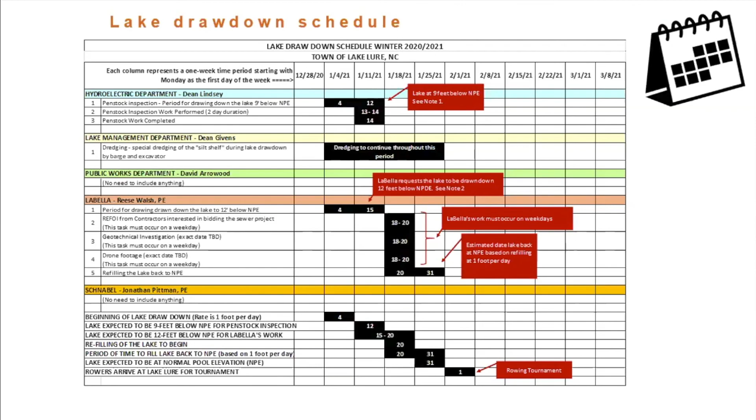During the time, for example this winter, this chart that you're looking at, Mr. Dean Givens knows that's the slot he has to do heavy silt removal. So every time there's a chart like this, Mr. Givens is looking at it to see when he can do his silt removal. So that attempts to answer that question. I hope I've satisfied the individual who asked it.

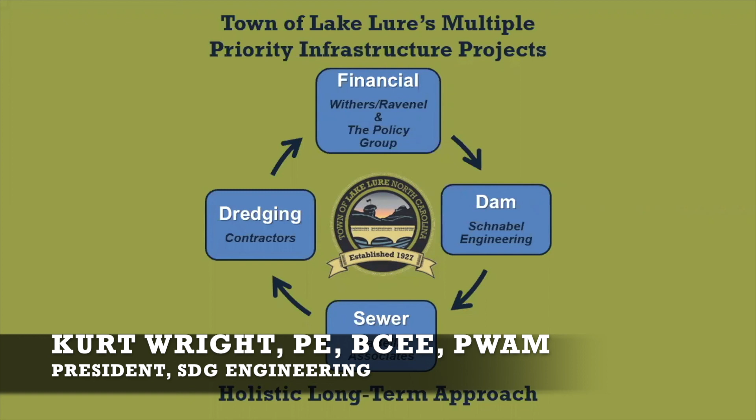Last question on dredging: does dredging include Rumbling Bald Resort? I have to turn to Mr. Givens to answer that. Mr. Givens said Rumbling Bald Resort has not made any requests this year.

Was there a follow-up question to me? No, I don't think so, but I would like to turn to Commissioner Diorio to talk about the schedule for drawdowns as well, to add input.

All right, thank you. Yeah, so it's important to set an expectation for drawdown of the lake. And I'll tell you that we all should be in the mode, me as well, I live on the lake, that the lake is going to be drawn down on a regular basis for at least some part of time every year to get this sewer system in. But here, the town council, we're very sensitive to that. We're going to minimize that.

In order to make sure that we minimize the amount of time that the water is down, we could use your help, because we're going to need to know what you need to do in any given year on your seawalls and what your concerns are, to help frame up this 5-year plan. We are going to make sure the engineering group is ready to work at the time of drawdown, so we're not sitting there with a drawdown waiting for them to get started. So we'll maximize the amount of time that we have.

Also worth mentioning is, as we go through the sewer project, the people doing the construction are going to get better at it, so we'll get more efficient as we go along. But we can use your help with information about what you need, and even more importantly, to afford us access for that sewer system.

Now, if you can imagine, this thing is going to go around the lake, and we're going to need to come to you to determine where we're going to put those stub-outs, how we're going to get to the water, how can we get material in there. Your cooperation and consensus, particularly with your neighbors, is going to facilitate that, which means less time that the water needs to be down.

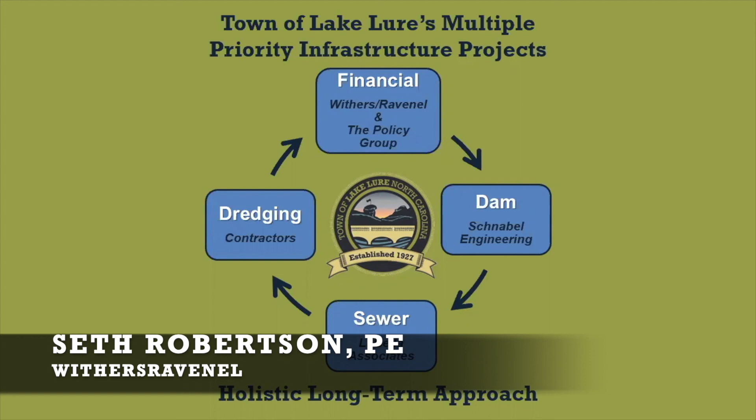Yeah, the only thing I'll say is I don't think there's anything off the table. It's more about having a funding plan of trying to go for the best funding and working your way down. And once again, that goes with timing and everything else. We've run scenarios for multiple different funding options and know what those costs are that are associated with that.

But I would say general obligation bonds are probably towards the lowest end of the list. There tend to be better funding options with much better terms that are much more likely than ever getting to general obligation bonds. They're kind of the last resort.

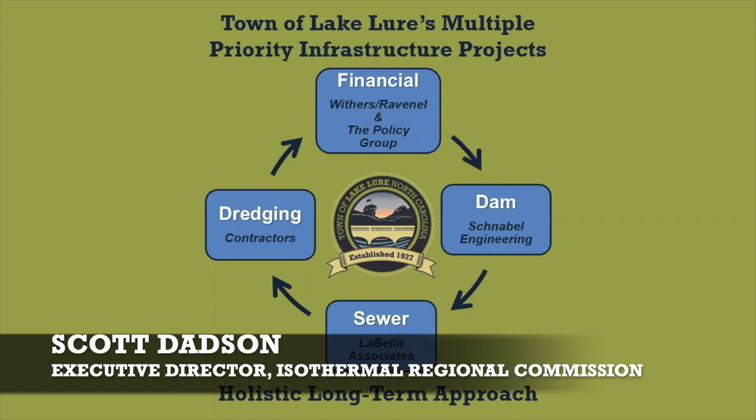Does that also include other taxes, lodging taxes, or other types of special sales taxes in the request and the consideration in your funding plan? Well, I would say that...

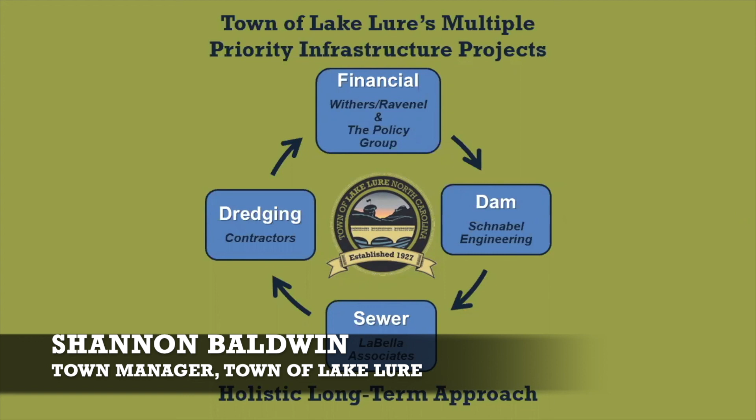There is significant amounts of revenue generated in the town of Lake Lure when a person stays overnight in our lodging facilities. Those taxes are collected and go to Rutherford County, which distributes them through the Rutherford County TDA. Having a way to recycle those funds back into our infrastructure helps not only year-round and second homeowners, but largely the tourists who come. I remember the Arnett Muldrow study said Lake Lure has the most tourism-based economy of any jurisdiction they had ever studied, and they do studies across the nation. So it's important to us to find those outside sources of revenue.

And the last question is, how will residents with lift stations to street level sewer service be affected by the sewer plan? Could you repeat that again? How will residents with lift stations to street level sewer service be affected by the sewer plan?

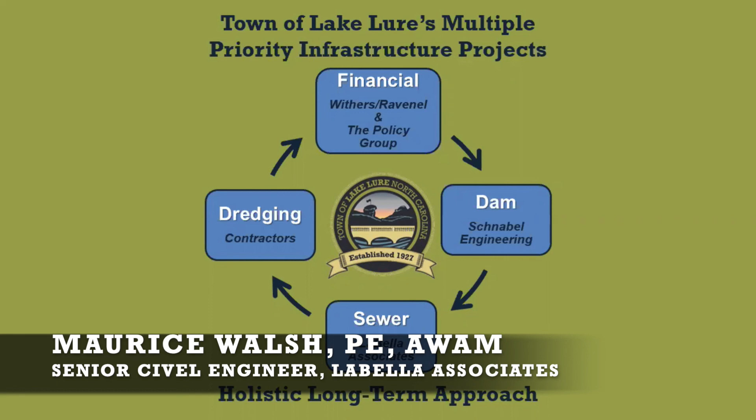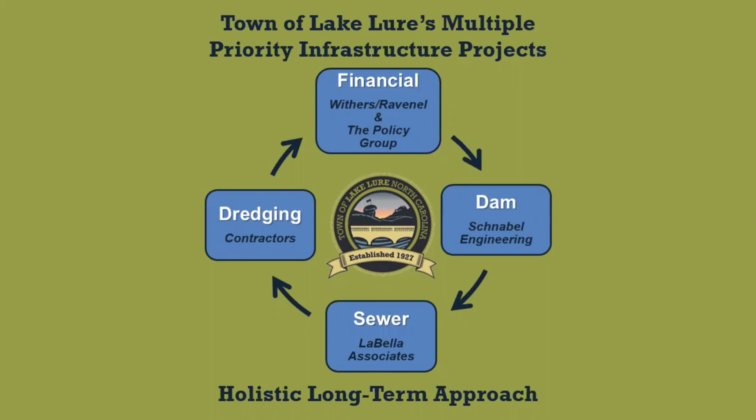If you're in a situation where you have a pump that pumps into a land-based system, that land-based system would ultimately flow into the submerged system, and that would be a point where it's picked up. If you're pumping up and around your neighbor, there would be several options. If you're a lakefront property, this system will be going basically in front of your house, and conceivably you could bypass your pump and tie in directly to the system without the pump. So laterals and tie-ins would in some cases need to be decided case-by-case, but essentially the system is going to completely surround the perimeter of the lake. If you have property that fronts the lake, this will run right across in front of that property.

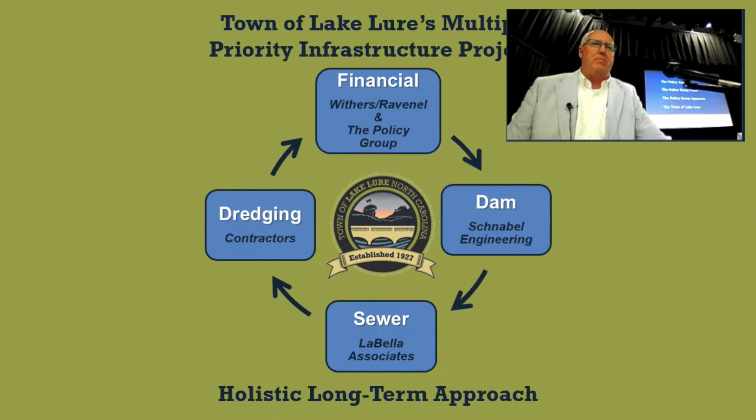Well, first of all, thank you all for coming. The point of these meetings was to make sure that everyone in the community of Lake Lure is aware of what our challenges are and how we are hoping to resolve those problems and how we will find the financial means to do that. We appreciate that very much.